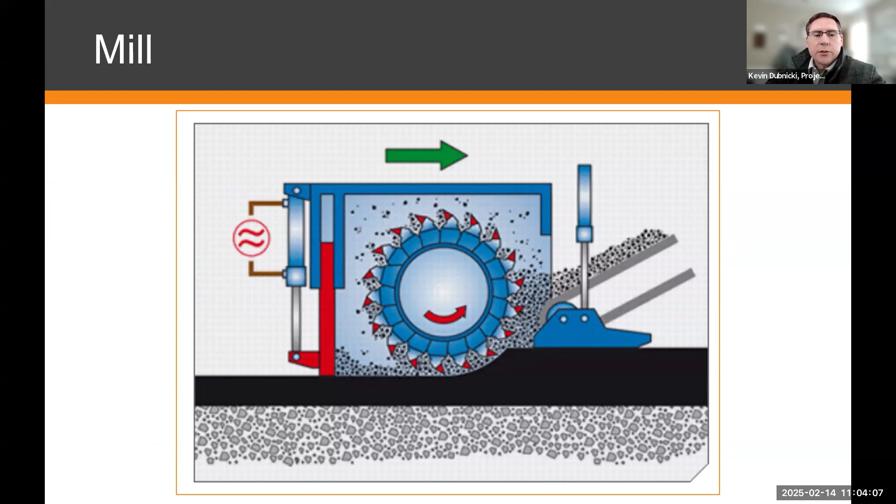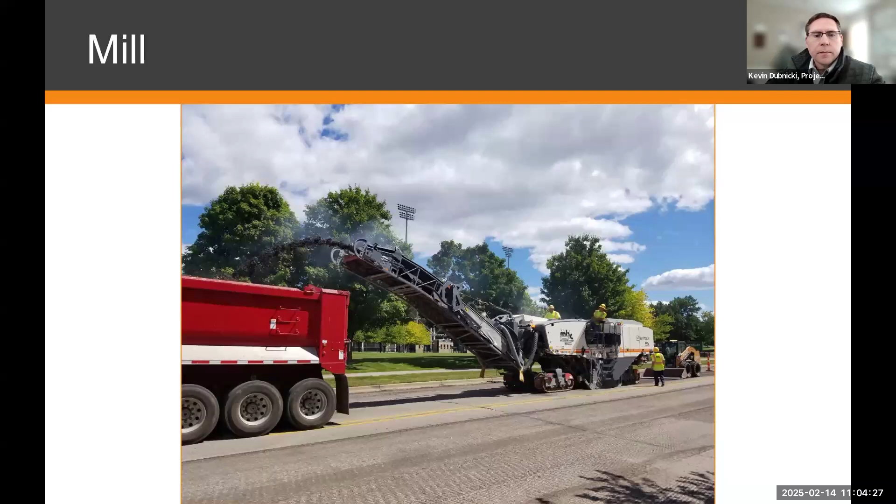We're looking at a milling machine, what it looks like and what it's performing on the road. As you can see, the milling machine mills or shaves off the asphalt from the surface of the existing roadway and deposits these millings typically in a truck to be disposed of elsewhere. Once the existing surface of the roadway has been milled off, we clean and prepare the surface to be paved with hot mix asphalt to create a new roadway.

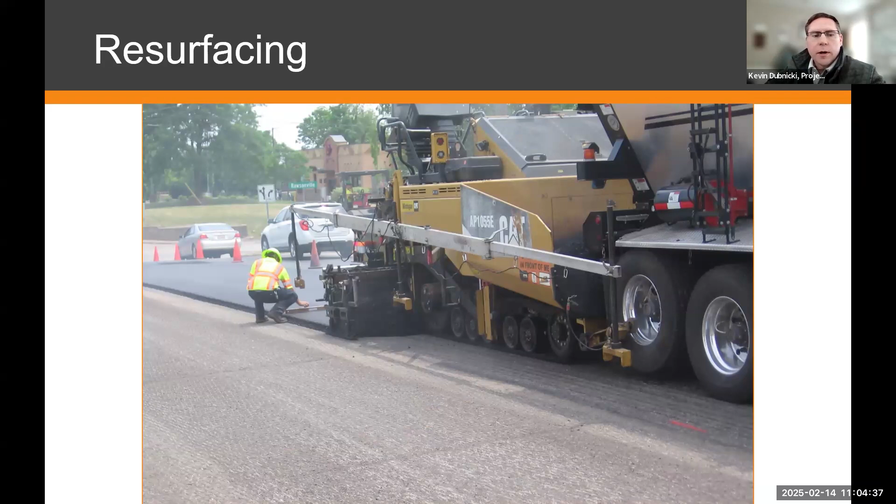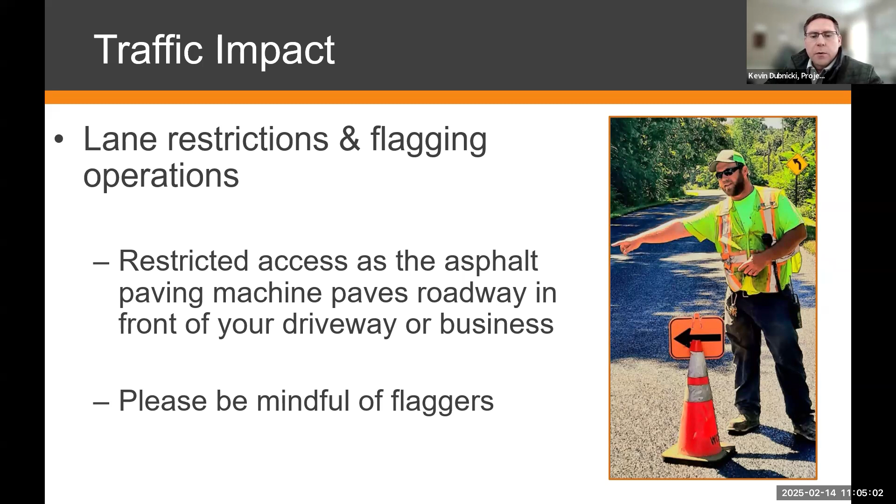During construction, our mill and resurfacing jobs will be performed under lane restrictions and flagging operations. The roads should remain open. Access will be maintained for residents who live and work within the project limits. However, please be aware that there may be times when equipment for resurfacing may be blocking your driveway. As I stated before, please reach out to me or road workers on site to coordinate any important accommodations.

I think we skipped ahead here. So, yep, traffic impact, there we go. At the end of the day, we want everyone to make it home safely, commuters, residents, and workers alike. Please remember that work zones are offices for our road workers. You should drive through the work zone like it was your brother or uncle out there performing the construction. Take it slow and be ready for sudden stops.

The next type of construction will be pulverizing and resurfacing. This type of construction is much more involved and completed on roads that may be in poor, rougher condition at the end of their serviceable life. Pulverizing a roadway involves taking the existing road surface and a portion of the gravel base, crushing and mixing these to create a new road base.

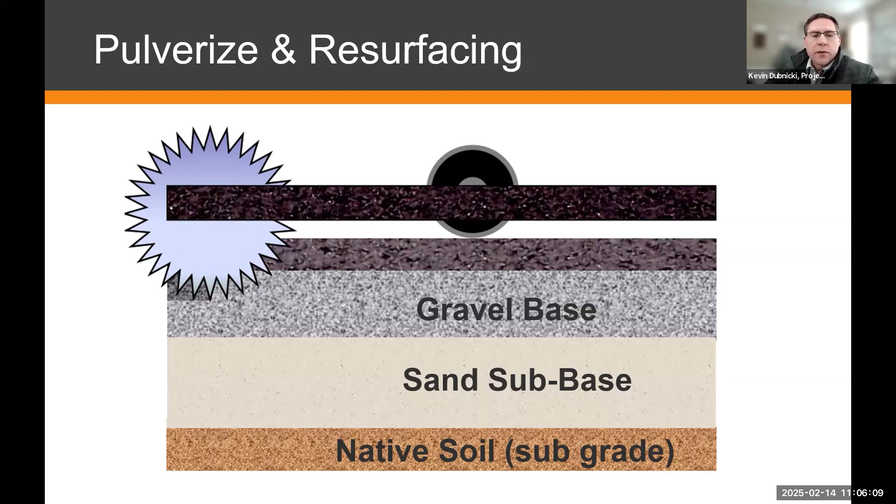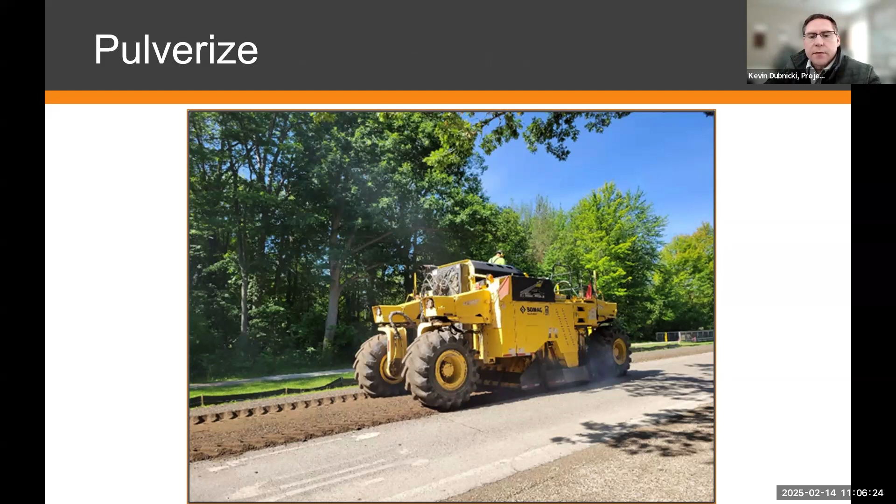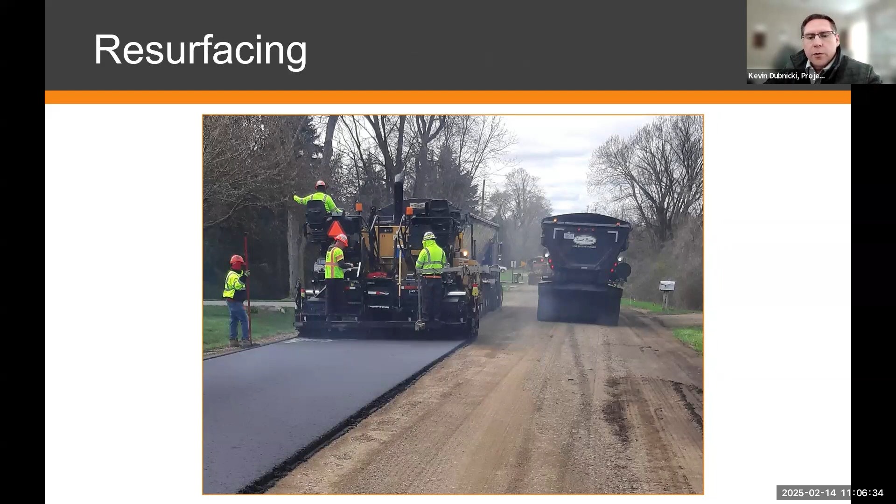Here is the asphalt machine that we use to pave over the new road that has been created from pulverization. To emphasize, when we close a road and you see barricades indicating a road closure, that means the road is closed. Please respect the closure and find an alternate route for your destination. We have the road closed for the safety of workers and you.

At this point, we're going to go through each of the townships and discuss some of the projects that are going on in each one of them. The first set of townships we're looking at is Lyndon, Dexter, Sylvan, and Lima townships. Within here, we have Dexter Pinckney Road between North Territorial and County Line, and Dexter Chelsea Road between Dancer Road and approximately Freer Road.

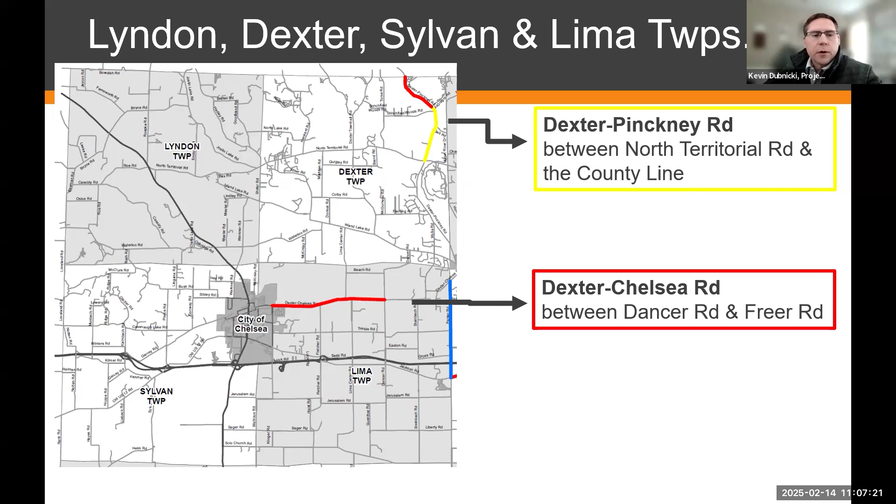Dexter Pinckney Road has federal money and federal buyout money, and its estimated cost will be $738,000. There are going to be some lane restrictions and flagging operations, but the roadway will remain open. Next slide.

Dexter Chelsea Road will also be a resurfacing project, federal and MTF money of approximately $918,000. This roadway will remain open during the construction process. It will have just lane restrictions and flagging operations during this. At this point, we'll have Mr. Felix Weber take over the next set.

Thanks, Kevin. My name is Felix Weber. I'm another project manager here at the Road Commission. So over in Lodi, Scio, and Webster Township, we got 3 projects. We got Parker Road between Jackson Road and Dexter Chelsea Road. We got Jackson Road between Parker Road and Dino Road. And we got Liberty Road between Zeeb Road and Scio Ridge Road.

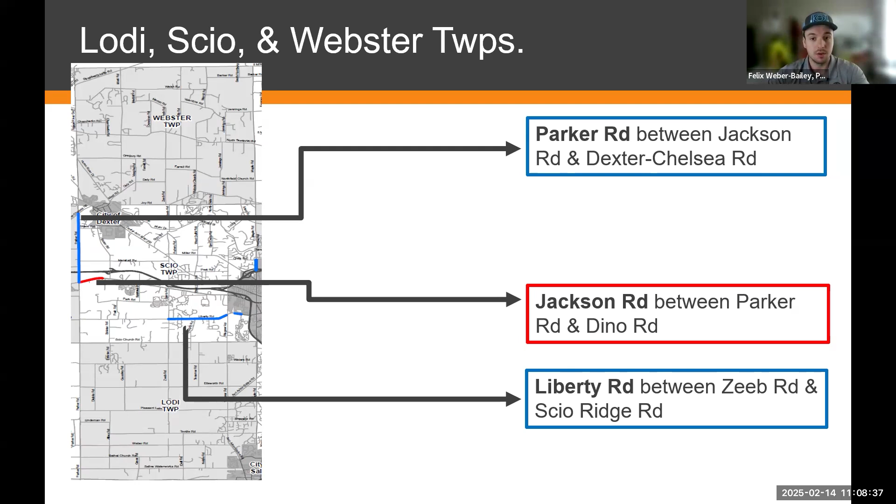For Jackson Road, this is going to be just a mill and resurface. Traffic's going to be maintained under lane restrictions and flagging operations. And we have an estimated cost of $395,000.

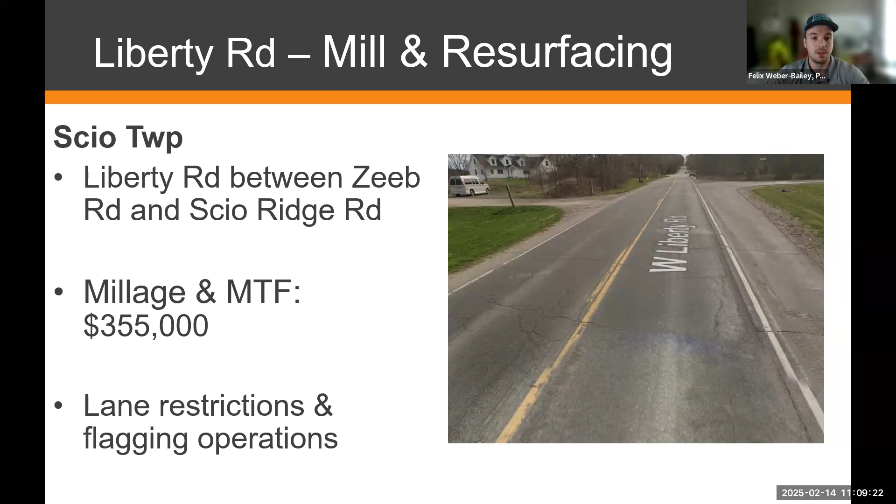Liberty Road is going to be the same thing. It's going to be a mill and resurface of the asphalt portions. There's a little piece, there's some concrete out there, and we're not going to be touching anything there. But it's going to be the same kind of thing. Lane restrictions, flagging operations, and our budget for this is $355,000.

Parker Road, another mill and resurfacing project. We're going to do a little bit of shoulder widening on this one as well. So our estimated cost is $1.6 million, and traffic's going to be maintained under lane restrictions and flagging operations again.

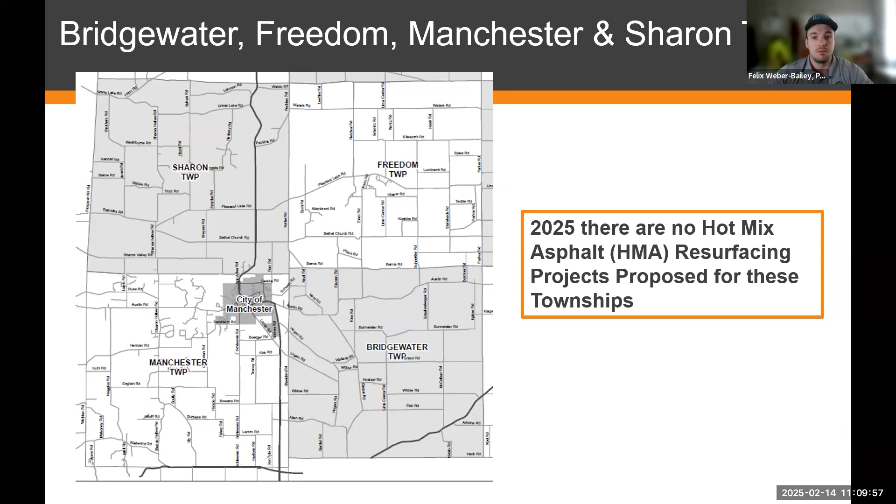Bridgewater, Freedom, Manchester, and Sharon, we don't have anything going on in these 4 townships this year at least. And then same thing goes for Saline, York, and Augusta. I think Kevin. Yes, sir. I get the big one here.

So just to emphasize here on the other townships that we just referenced, it just means that we're not working on HMA projects for this particular season. There'll be other work that'll be going on, but we're only discussing the resurfacing projects right now. So it doesn't mean that those townships won't have anything going on, just not the HMA for this year.

Going on to the next set of townships, Ann Arbor, Northfield, Salem, and Superior townships. Maple Road, 7 Mile Road, Whitmore Lake Road, Nixon Road, Curtis Road, Earhart Road, Clark Road, and Geddes Road at Superior Road at the roundabout will all have resurfacing and crush and shape projects that will be going on.

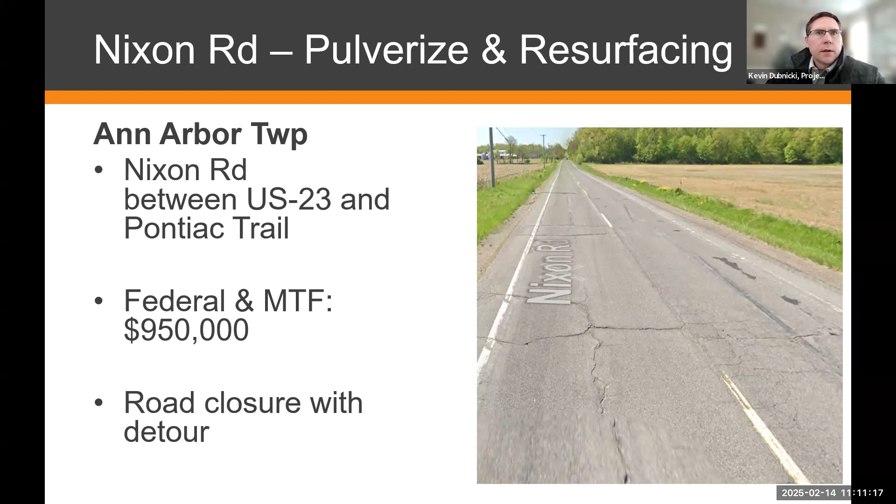At Nixon Road, we're going to be pulverizing and resurfacing this particular road. It will take a little bit longer to complete this work. It will have road closures with the detour, and the estimated cost is $950,000. Next slide, please. The detour for Nixon Road will be utilizing predominantly Pontiac Trail to move around this.

There will be some road closure right at the intersection of Nixon and Warren Road, where we'll be doing some culvert work. That reconstruction may delay things a little bit for Warren Road. It'll be determined at that time whether or not we let any through traffic through Warren, but at this point, at the Warren and Nixon Road intersection, just anticipate that that will be closed during that construction process. But again, I don't anticipate that this is going to be much more than a 2 to 3 week process for doing this work.

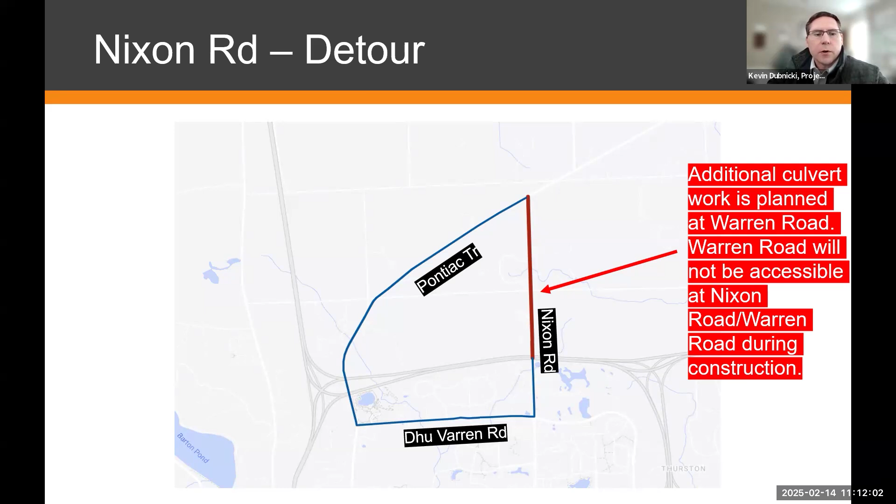Next slide. Earhart Road, we're going to be doing some resurfacing of the road. This is over by Domino's Farms. It's going to have lane restrictions and flagging operations. Estimated cost for this is $589,000.

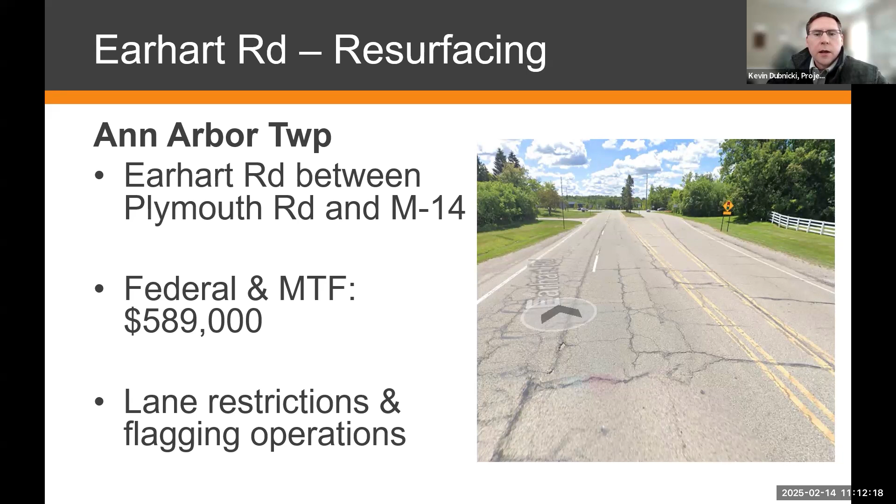Next slide. Whitmore Lake Road will also be a mill and fill resurfacing project. We will have just lane restrictions and flagging operations. The roadway will remain open. This is federal and MTF money of $474,000.

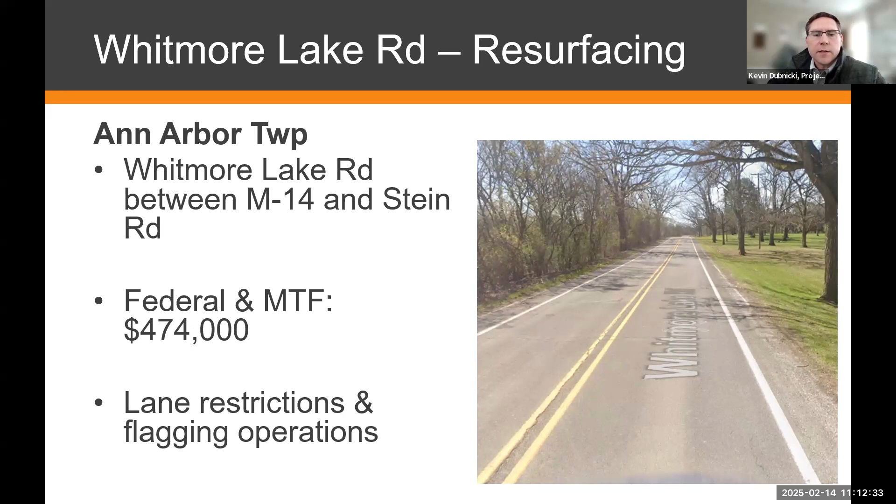Yeah, so we're doing Maple Road between M14 and Craig Road. And as part of this project, we are doing the 2 northernmost roundabouts. We're resurfacing those as well. So in order to safely and efficiently accomplish this work, we're going to be closing this. The duration is just a resurfacing, so the duration is going to be around a week. But again, that depends on contractor scheduling and weather, but hopefully it should go pretty quickly.

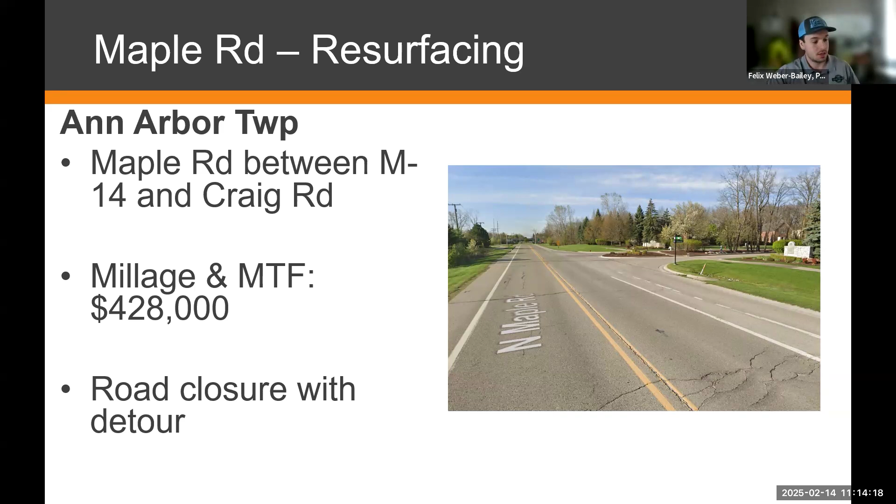Our estimated cost for this project is $428,000. And this will be going during the summer when school is out. I know Skyline High School is right there, and that's definitely a concern of ours. So we're gonna accommodate those needs. So that's the detour for it.

We're gonna pick them up at Miller Road and Maple and send them down to Wagner and then along here on Huron River Drive. We're gonna have to work with MDOT probably to close that ramp on M14 westbound going onto Maple. We're gonna have to coordinate there, but it's gonna be a relatively short duration closure.

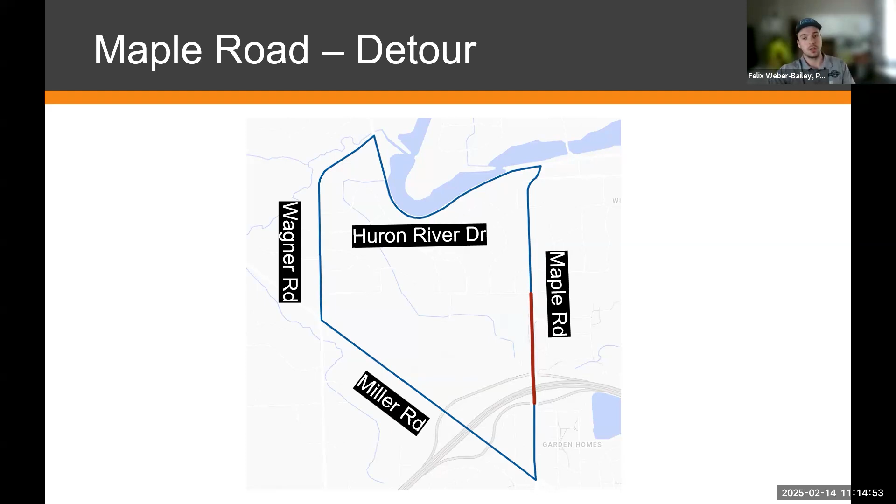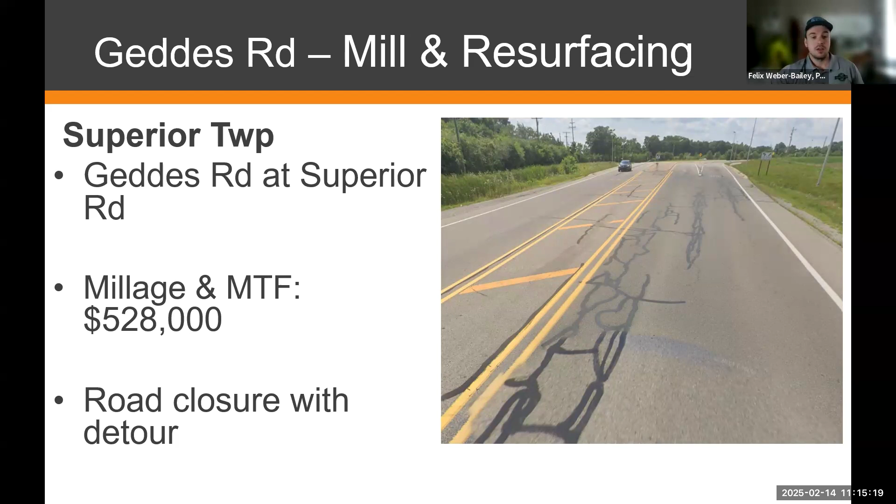And then Geddes and Superior, the roundabout. This is also gonna be a closure, probably about a week. Again, that depends on the usual contractor scheduling and weather. But we are doing the roundabout and then the approaches leading into the roundabout as well. We got an estimated cost of $528,000 for this. And here's the detours.

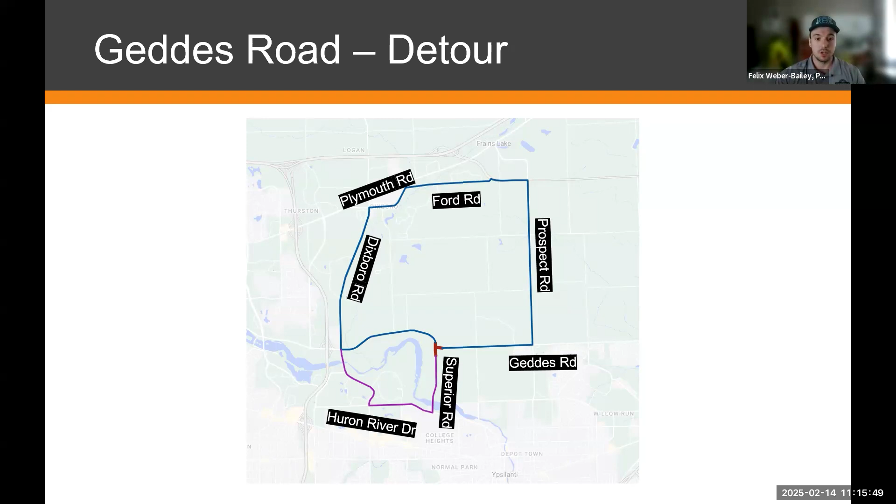We got a detour for Superior Road and a detour for Geddes. It's kind of a long detour, especially for Geddes, but it's kind of all we can really do to maintain traffic on a hard paved surface. So sending up to Plymouth and Ford Road and then down Prospect. The detour for Superior is a little bit shorter.

And then for Pittsfield and Ypsi, we got Golfside Road between Packard Road and Clark Road. We got Holmes Road between, sorry, there's a typo there, US 12, Michigan Ave, and Ford Boulevard. And we got Waters Road between Oak Valley Drive and Ann Arbor Saline Road. We got Ellsworth Road between Platt Road and Carpenter Road. And then State Road between US 12 Michigan Ave and Old State Road.

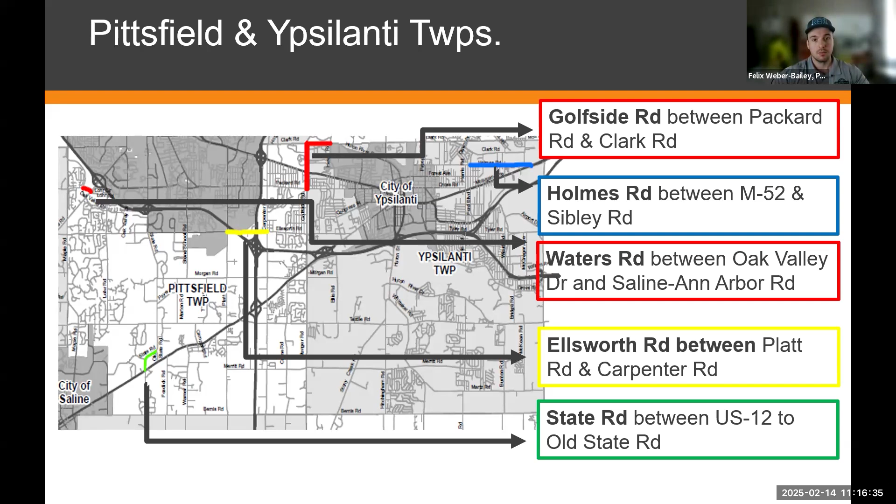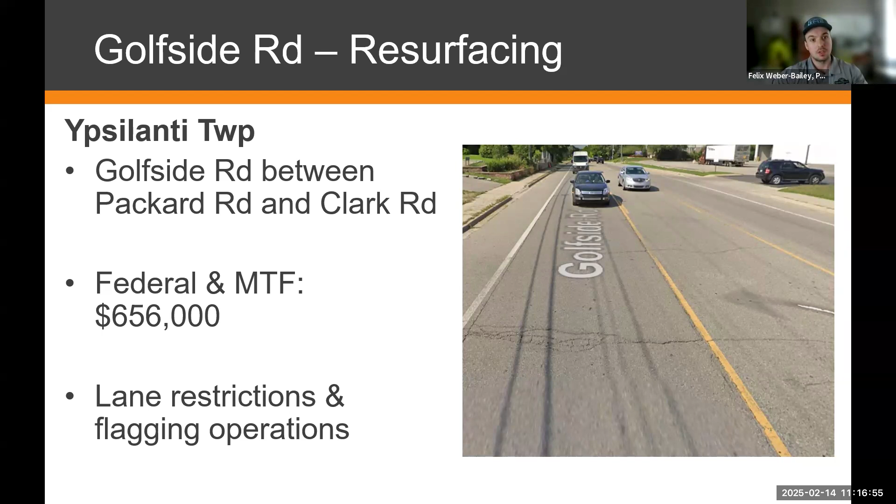So for Golfside Road, this is a mill and resurface project. Traffic's going to be maintained under lane restrictions and flagging operations, and we have an estimated cost of $656,000. Holmes Road is the same kind of thing, mill and resurfacing. Again, we got lane restrictions, flagging operations to maintain traffic, and we have an estimated cost of $717,000.

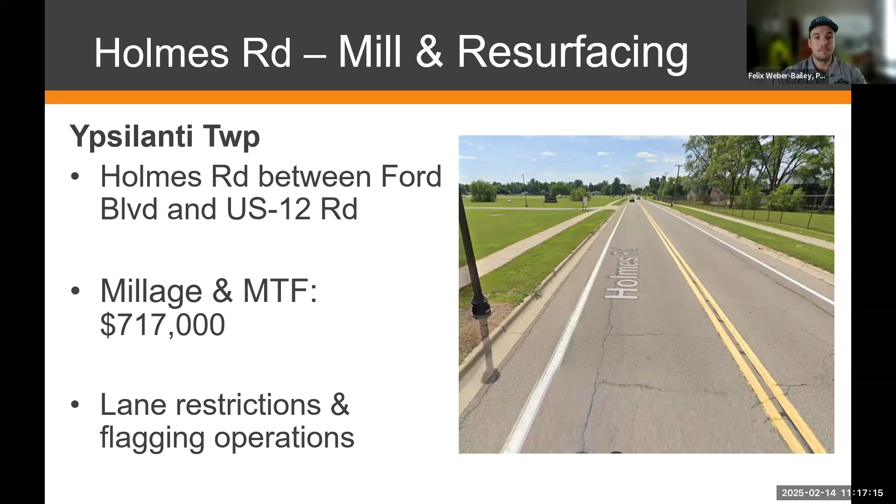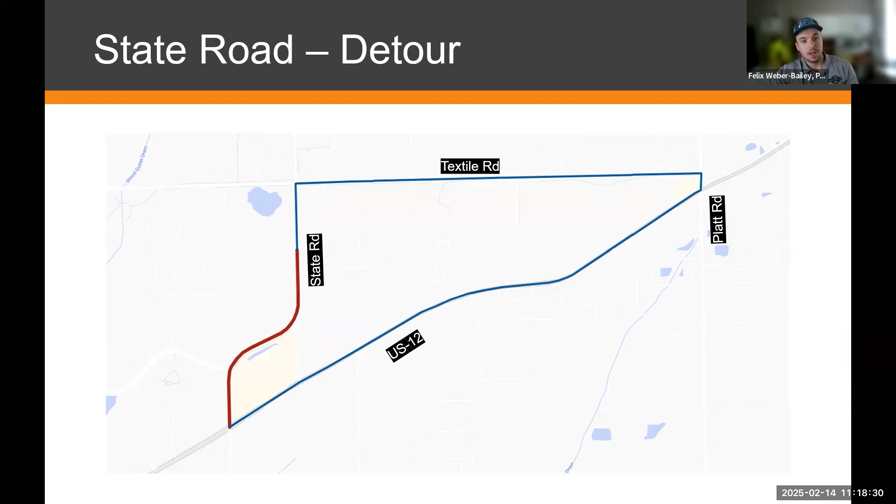So to facilitate the widening work, we are going to be having a road closure on this one. It's probably going to be a longer duration, 3 weeks, maybe 3 to 4 weeks, possibly a little bit more, again, based on contractor scheduling, weather. Then we have an estimated cost for this one of $728,000. And here's the detour: Textile Road to Platt Road, then Michigan Ave, US 12, back down to the intersection at State.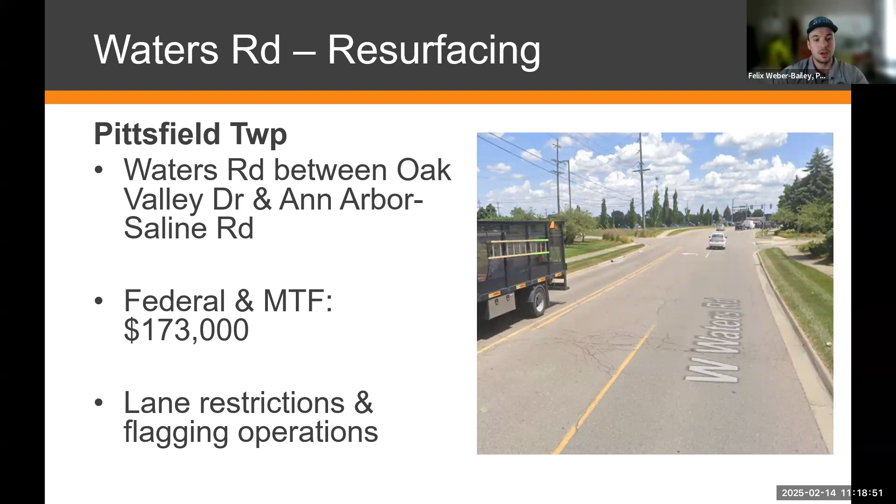And then Waters Road, this is a mill and resurfacing project. We got the lane restrictions, flagging operations. And our estimated cost for this one is $173,000.

In our limestone gravel road resurfacing projects, many of the scopes include some of the following activities: canopy cutting. We do drainage improvements, which includes culvert replacement, ditching, berming activities. We also do boom mowing, which would be also considered heavy brushing, where we clear the roadside to access the ditching and areas for improvement. We also install limestone or gravel. These 3 projects that we're going through this year are all limestone resurfacing projects.

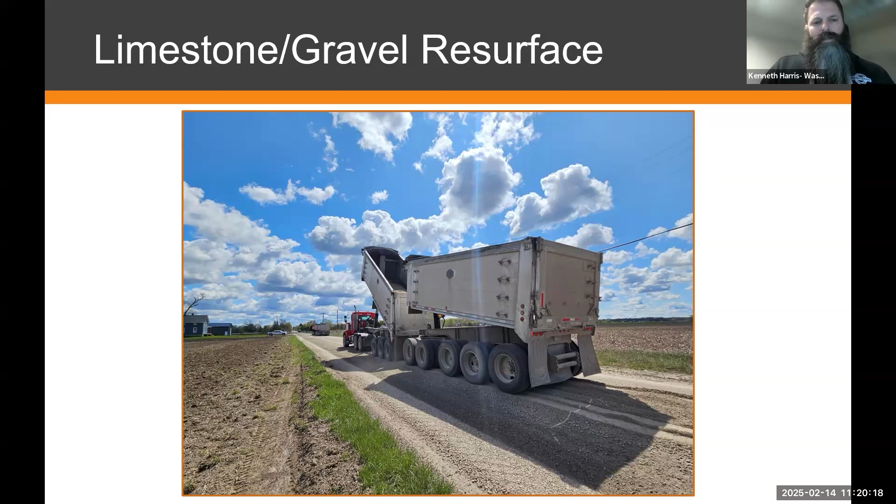One thing to be mindful of when we plan these projects, canopy cutting will start as early as Monday, February 17th. There will be a period of time once forestry and canopy is completed that we will get back on drainage once the weather allows us to. And once drainage is completed, that's when the stone will be scheduled.

So I will move into the first project that we got listed. We have Walsh Road, which is between Mast and Scully Road. This is an $80,000 portion from the millage. We've also worked with Webster Township throughout this partnership, so we greatly do appreciate the partnership that we have with Webster Township when it comes to this.

There will be a daytime road closure. If we're performing culvert installs or replacements, that's when we may get into a full-time closure where the road has to be closed. Usually it'd just be during the daytime. Most of these activities will be completed during a normal workday.

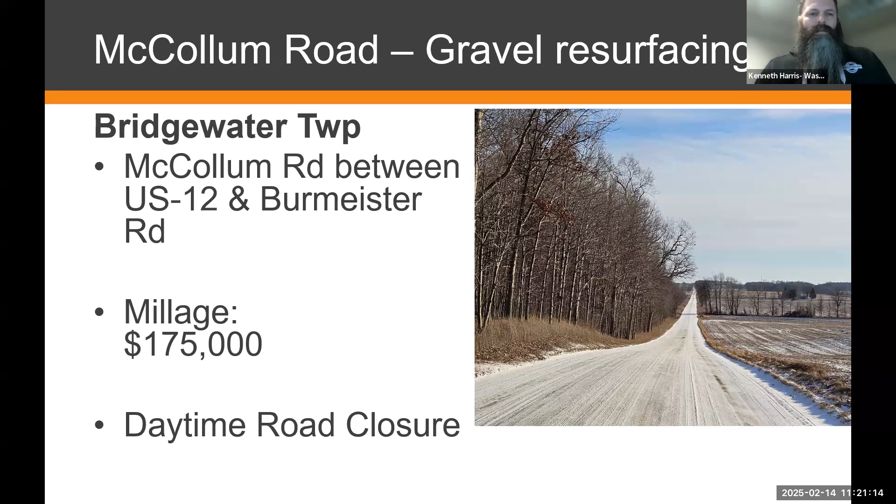The next project that we have at hand is McCollum Road. It's a limestone resurfacing road that is from McCollum Road down to US 12 down to Burmeister Road. The price for that is $175,000, and that will be a daytime road closure as well. Lastly, we have Bemis Road. This is between Whitaker Road and Rawsonville Road with a price tag of $228,000. And this will be a daytime road closure as well.

And then lastly, as mentioned, the majority of these projects will be a daytime road closure. Access will be maintained for residents who live or work within these project limits. We will accommodate as much as we can, but we still have to perform the work as needed.

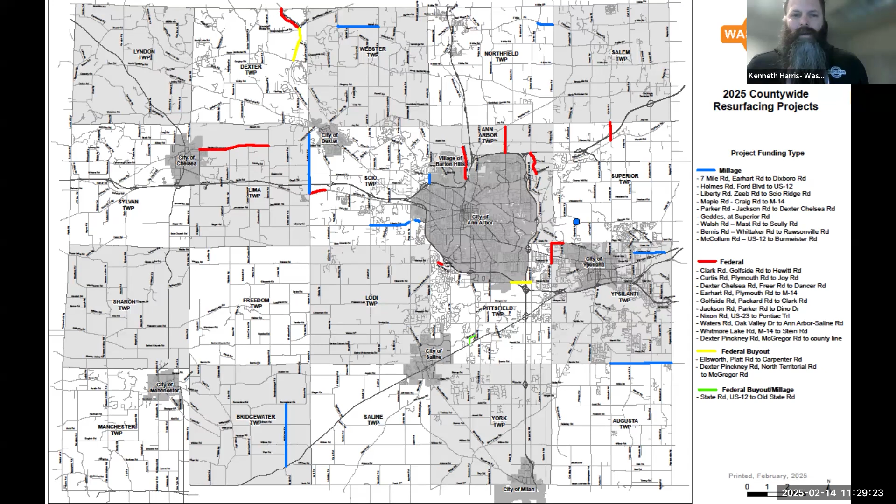Basically just to resurface it, and it's okay. I was talking to a guy, and he thought they're going to just go to each side and just wallop it, but okay. No, not really. That's not the intention. If trees are removed, it's because they're dead and present a hazard to the roadway. Okay.

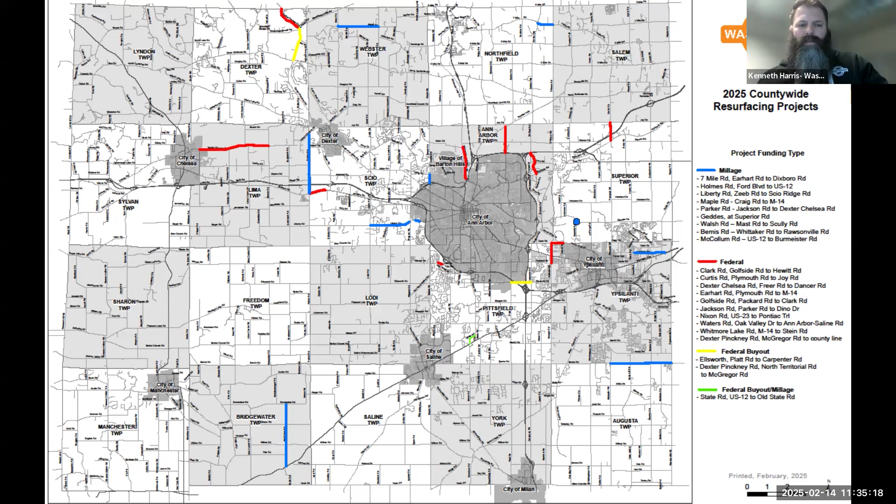So Warren and Nixon, we are going to be doing some improvements over there. Warren and Curtis also is an intersection that is along the route there. So we are doing work along Curtis Road. So I guess there could be confusion that it could go either way. But we will be going into Warren Road to address the approach work on that.

Same thing along Curtis Road at Warren. We will be going in a limited distance in there for the approach work on that as well. But we are not going, let's say, significantly back on Warren. So I guess the answer for both of them is that we're going to be working on the approach work for those, but it's only going to go a limited distance back. So hopefully that covers the area that is of concern.

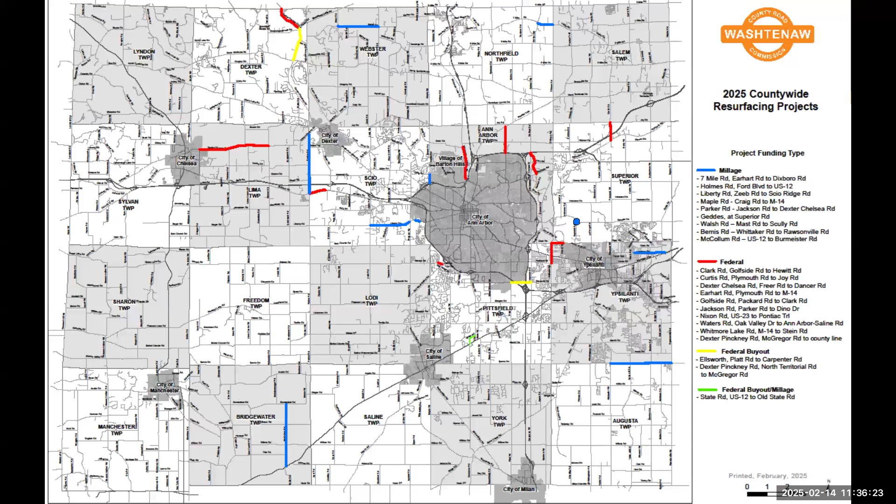Okay, thank you. Thank you, Kevin. Skip just wanted us to make sure that we examine Curtis and Warren. He wanted to reiterate that point. Thank you, Skip. Are there any more questions to discuss?

Hey, Tiffany. Yes. Go ahead, Burk. If I could for a moment, I'm Aaron Burkholtz. I'm the Assistant Director of Engineering with the Road Commission. Just some of the items I've noticed as we've gone through the presentation today, and appreciation to all the staff that have participated, who have prepared for this meeting. Appreciation to Tiffany for assisting us and supporting this effort to communicate with the public, and certainly thanks to those in the public who have attended today.

One of the terms that you may have heard mentioned during the presentation is HMA. So that's hot mix asphalt. And for us as road builders, we use that every day. And sometimes that can be lost on us that others might not know what that term means. So HMA is hot mix asphalt.

As we were talking about road closures, I just want to make sure that we're clear that during a road closure, we still maintain traffic for local traffic. So for residents or businesses that lie within the closure limits for any one of these roads that would be closed, we ensure that you can get to and from your property, that deliveries or like trash pickup, that's going to continue during the road closure. Certainly wouldn't want anyone to misunderstand and think that a closure means you would not be able to get to and from your property.

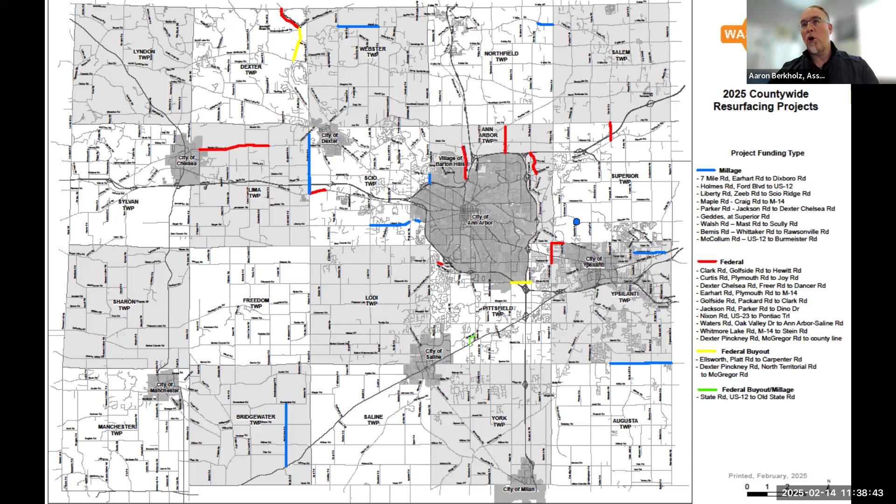And then just making sure that we're clear on Holmes Road, and apologies for the error in our slides. The limits for Holmes Road is from Ford Road to the US 12 business route, better known as East Michigan Avenue. So again, Holmes Road between Ford Road and East Michigan Avenue, that's the portion that's going to be milled and resurfaced. So just a few additional thoughts that I wanted to offer, Tiffany. Thank you. Thank you, Burk. I'll go to the last call for questions, concerns.